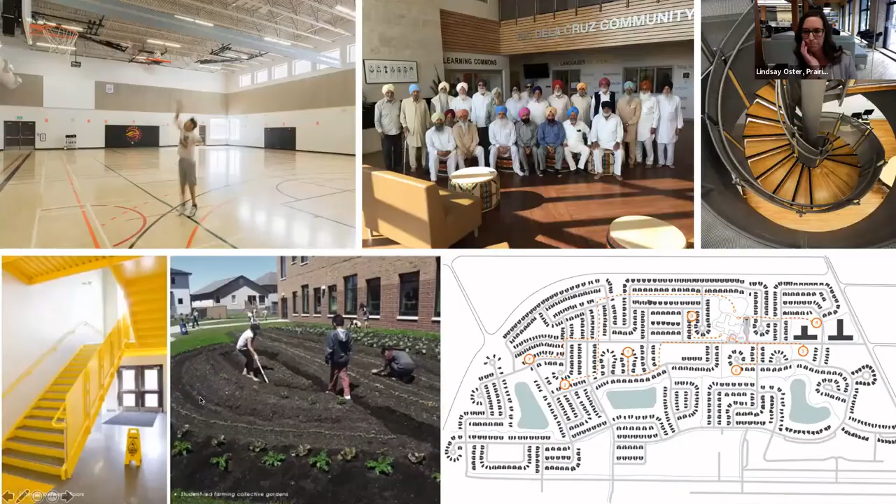So certainly education, early childhood development, but even into employment and working conditions, topics of food security and insecurity, social exclusion and having a social safety network, and of course, gender, race, disability, Aboriginal status, all of these pieces really come into play. So here are a few snapshots from the Amber Trails school community that highlight health and well-being and really start to show how a school can start to contribute to these social determinants of health.

The map on the bottom right is the surrounding community of the school. Here's the school tucked in here. And you can see with these orange dashed lines, these were a network of 7 different walking school bus routes that were actually part of the plan before the school was completed. And so these walking school bus routes encourage active transportation. And through this, the school has seen a 61% reduction of single occupant vehicle usage based on the number of students that then of course walk, bike, roll, or bus. I think this was in the first year, so I'm not sure if those numbers have maintained.

But then you can also start to see, in the upper right corner and lower left, ways that the design started to focus in on health and well-being, and on the top right, looking at even more biomimicry and biophilia in the design. The top left showing a shot of the gym. And what's quite critical here is for years, school designs sort of pushed these big masses of the gym to the inner part of the site or in the back. And in this school in particular, it was really important to bring that to the front, open it up with windows so that it really did create sort of a community usage aspect to it, and as a community center, really.

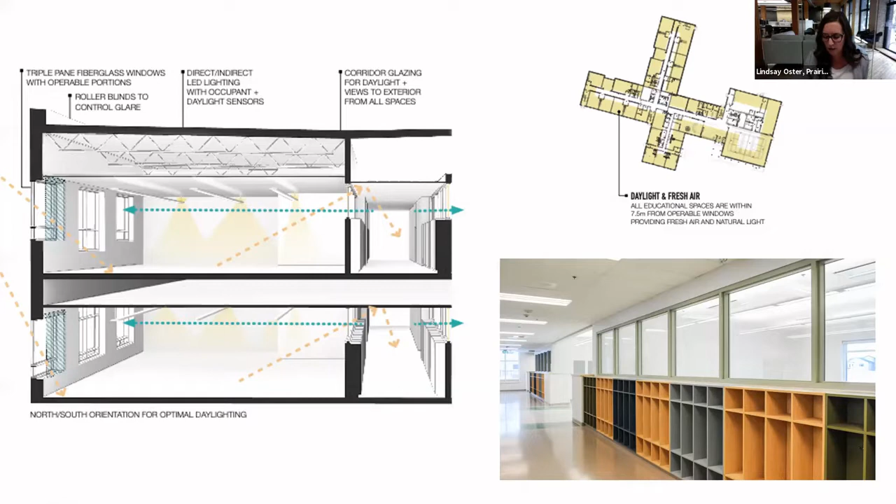And the top plan here shows that all of the educational spaces were designed to be within 7.5 meters from an operable window that would provide fresh air as well as natural light. And that's really key as we're going to start talking about ventilation, I think, in upcoming presentations here.

Okay, so moving into that next theme, energy and other performance metrics. So again, we've had this conversation lots. I think we shouldn't be patting ourselves on the back for being quote unquote better than a less than stellar baseline standard. It really tends to be the pitfall of any certification process, but it's why I think a more holistic approach is important. That said, however, there's no doubt that using targets and performance metrics and benchmarking really are tools that design can use, and it's what drives and creates the high-performing buildings. And without those stringent requirements in place, projects just simply fall short and don't meet those requirements.

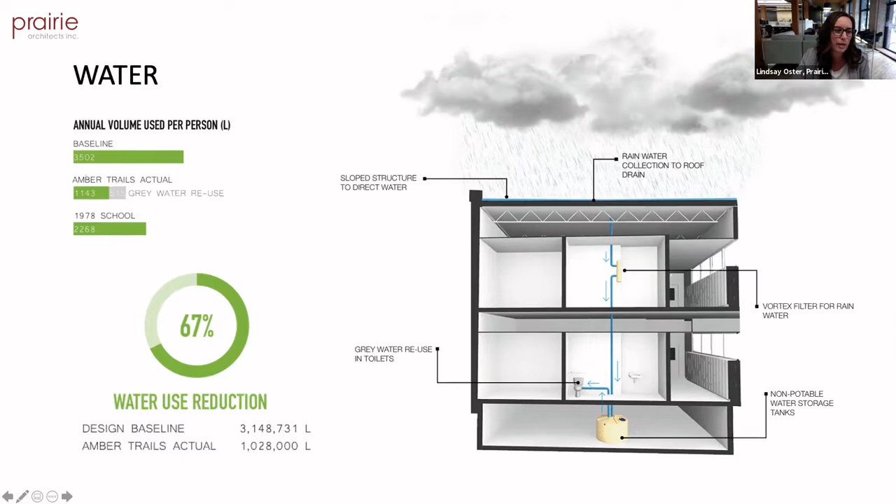So looking at water in particular, the system was designed to collect rainwater in 2 large cisterns in the utilidor. It's a basement space, basically. And that water is reused for the gray water reuse in toilets. And this, with fixtures, really contributed to quite amazing water use reduction numbers. And again, looking at the baseline, probably, like I said, less than appealing baseline. And so Amber Trails is great, but it's also important to look at other kinds of benchmarking. And so when you look at a 1978 school, for instance, really that gray water reuse contributed to quite an excellent water use reduction.

Energy. So there's a lot in this slide, and I don't want to take up too much time going into it, but I do want to say that very early on, the school division decided that the school would be heated and cooled by geothermal, like a ground source heat pump. But there was a really conscious effort to eliminate dependence on fossil fuels. And so the school made the choice not to bring any natural gas service to the building to eliminate any future greenhouse gas emissions. And that was really quite key in this design.

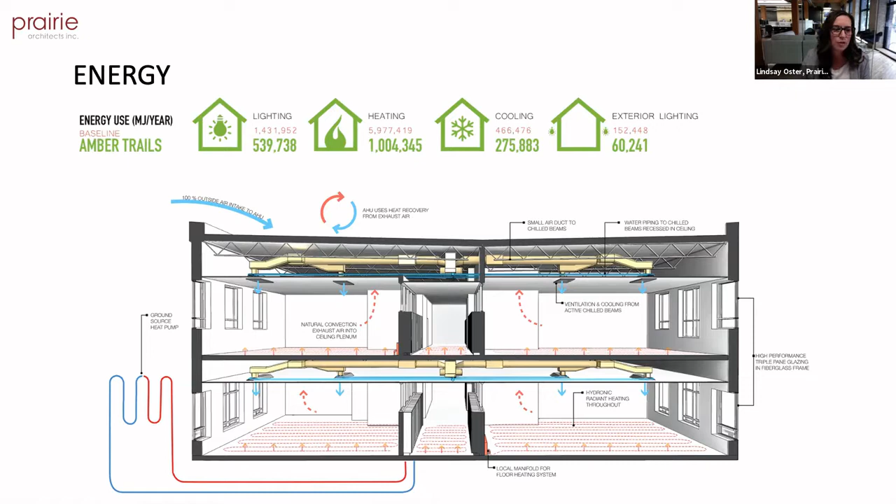So there's a ground source heat pump, as I mentioned, that brings heating to a radiant floor system. For cooling and ventilation, there are active chilled beams in the ceiling space. And then, of course, all of the contributing parts of high performance triple pane glazing and air exhaust. All of these things really contributed quite a bit to the energy savings for the year. So there's a lot of the stats at the top. You can see that there's quite great energy savings.

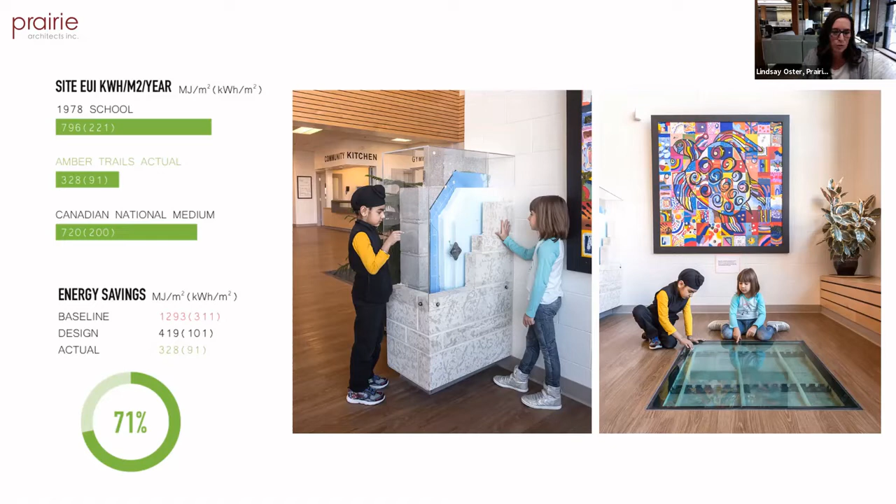But I think what was also quite interesting in this is it's one thing to design a building a certain way, but it's another thing how the building is actually used. So in the first operational year, the school used less than we even anticipated in design. So the school used 91 kilowatt hours per square meter per year for their energy use intensity. And this actually beat the national median by 54.5%. So it's quite a good performing building. And we'll talk a little bit more about how that's exhibited throughout the school so that kids can actually learn from it, as is shown in a couple of these shots here.

But for all of those people that like graphs and metrics, this is a section to talk about it. So what you're seeing on your screen here is a table from a presentation that Public Schools Finance Board gave a number of years back now, I think 2014, and it was entitled The Path to High Performance Schools. And so this looked at a comparison of Manitoba schools over time. And at this time, they were using the line, which is shown in purple here, if you can see, as the 10 kilowatt hours per square foot. So I've just switched metrics here from square meter to square foot, but for those of you that know what that means, hopefully you got it.

And they basically defined that any performance that would fall under this 10 kilowatt hour per square foot threshold would be defined as what they called a zero energy capable building. And so I think really what this is, is the net zero energy ready buildings that we're seeing now with the CAGBC programs. So the blue parts of the bars represent the electricity consumption, and the red is the natural gas. So you can see from the pre-50s buildings to where we were in 2014 with the new schools, you can see sort of what we're doing with that.

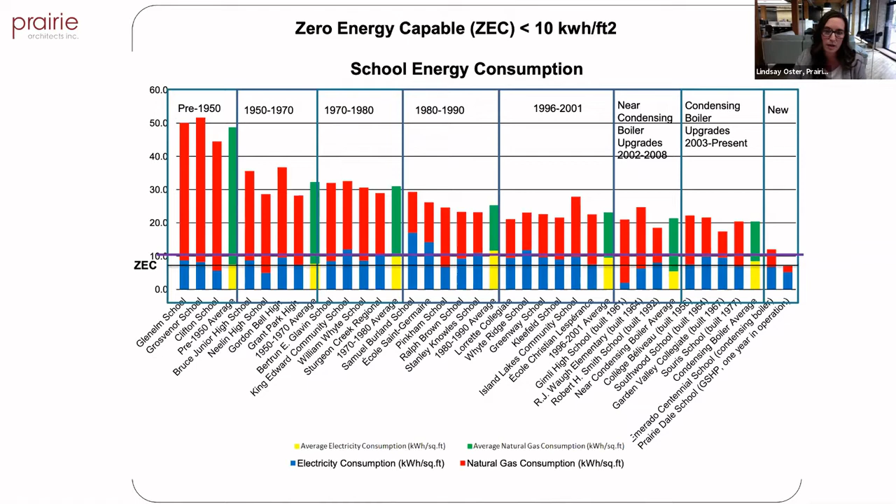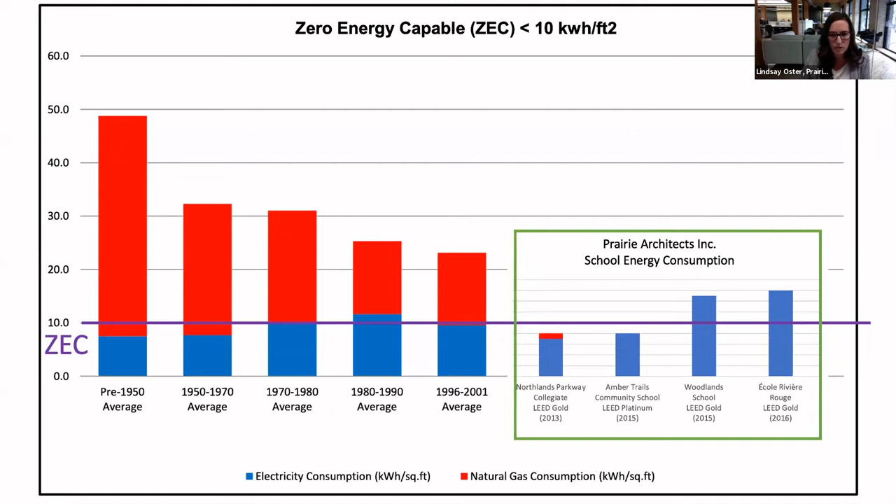So we're in design on other schools, and so we don't have these final metrics to be comparing them, but I do think it's interesting that we can start to see this trend a little bit more.

And so how are we doing for time? I have just 2 more, but they're a little bit quicker.

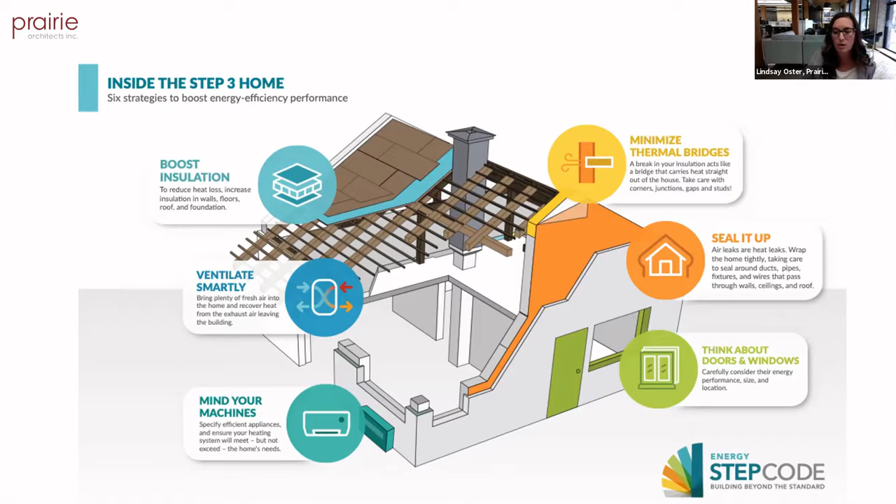But I did want to just point out that according to the Pan-Canadian Framework on Clean Growth and Climate Change, they actually last year said that construction costs for net zero energy buildings had dropped by 40% in the past decade, and are continuing to fall. So I don't know what the pandemic did to that, but it actually starts to become a more realistic future for projects in general, but I think also schools, and we need to start thinking about that.

And I know it's not a school project, but I did briefly want to just show this, because I think that Matt and others might start talking a little bit about displacement ventilation and other aspects related to ventilation. This is a daycare that we did, it's also LEED Platinum certified, and had really, really great metrics. And part of it was largely due to the displacement ventilation system. And also progressing even further from active chilled beams to passive chilled beams for cooling in this daycare.

But when we're talking about future-proofing, what's also interesting to note is that all of the south-facing roofs of the daycare additions to this historical turn-of-the-century house have been provisioned for a future PV solar array. So thinking ahead to what utility costs will do, and as we need to future-proof our buildings, it was important for Canada Life to look at that.

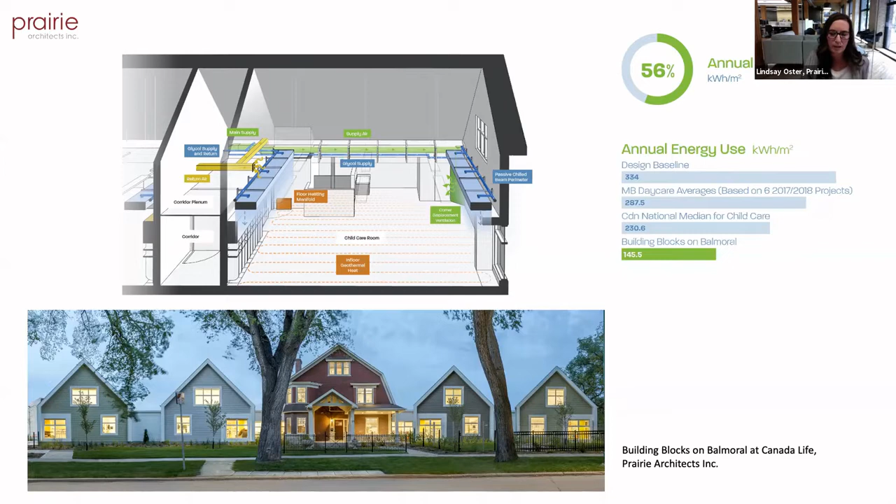And it was really important because it's enabled students to interact with the school facility in ways that they've said have raised their awareness of energy conservation and resource consumption, waste generation, and the influence of the microclimate on building systems and human comfort. And so the school won the Greenest School in Canada competition in 2017. And I think Lorelei will talk a little bit more about that. So this is probably a good jumping off point for her presentation.

But it was really interesting. This had nothing to do with what Prairie or the consultants or the contractor did for this school. But the students started a student-run organic vegetable farm the year after the building was finished. And they work in the summer with a farm coordinator, and they grow a mixture of over 20 different varieties of vegetables. They sell it to staff and community members through a CSA model. And they're learning a lot while doing it.

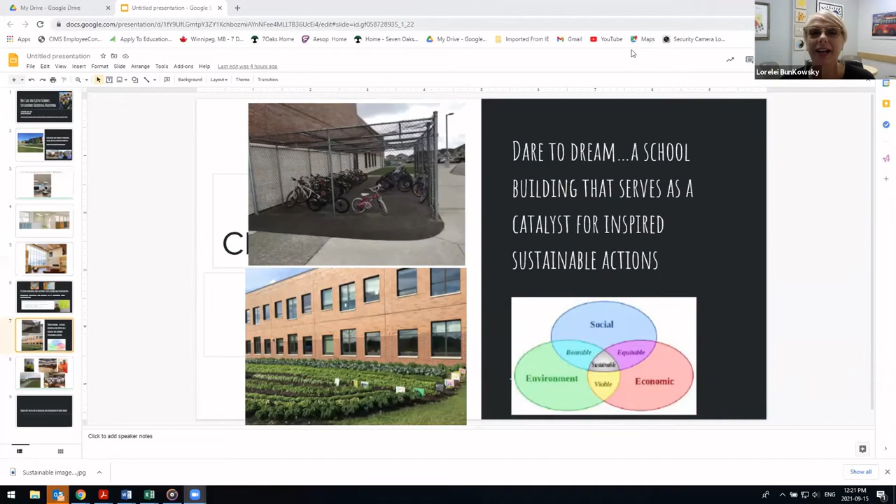Okay, well, Lindsay, it's nice to see you, by the way, and Dudley also. I know both of them from this project, and my name's Lorelei Bunkowsky. I'm former principal at Amber Trails, and I'm just going to get my screen share set up. Lindsay, it's really funny because you and I actually have some of the exact same photos. So the things that really struck us and were part of the work there. So anyway, I just need to undo this. Hold on a second. Sorry. Lorelei, that's why I was really glad to go first. Okay. Well, I hope to go into a little bit more depth into the ideas that you spoke of. So yeah, can you see my screen okay?

Yeah, good. So I wanted to start off by talking about this notion of beginning. And I first want to acknowledge that the former government took bold steps and was courageous in funding schools such as these. And it's a different time now. And I think that needs to be acknowledged because the kind of vision and the way in which this sustainable development priority was funded, I don't know if we would see that existing right now in our current government. So I'm really thankful for that.

Also, we're thinking about this idea of from bricks and mortar to this building of culture. So I had the privilege of being appointed to a school that was just being built, and it really is bricks and mortar. You walk through the building as it's being constructed, and all along, as we saw it in various phases, the discussion was always around the green features that were being built right into the school. So, as a person later in my career as a school principal, a lot of young people in the field as teachers are far more sustainably minded than I might be.

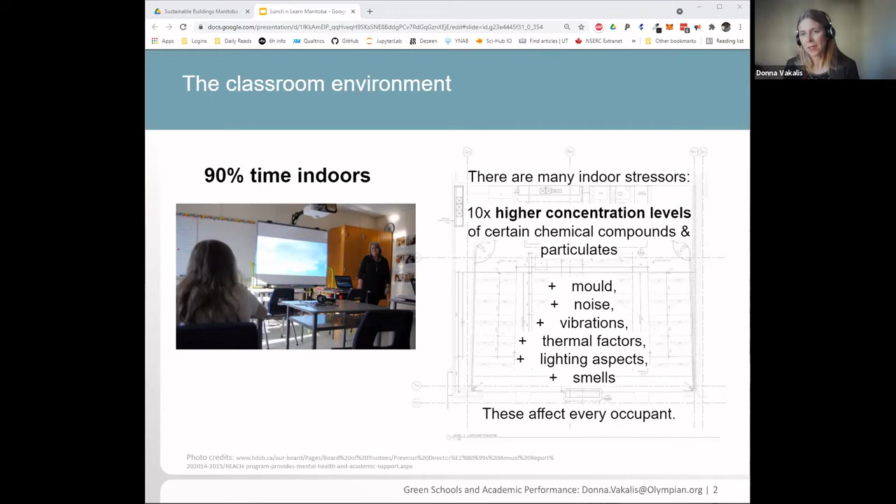And what it means is these little tiny factors inside the school, even if they're small exposures, like a little bit of mold or a little bit of discomfort, they add up. So small, tiny impacts, when you do these exposures repeatedly, can be one of the most impactful things on our health and on our well-being. That's the crux of my PhD. I looked in particular at school buildings and how these little exposures impact academic performance.

And I also have another background, which I will mention here because it's actually relevant. So I studied engineering and epidemiology for my PhD, but I also trained as a national team athlete and went to 2 Olympics. And high performance athletes have 2 really important things in common with young people going to school. One is that when athletes are training, no surprise, the air quality really matters. So one of the things we'll talk about today, and will be the focus of the next presentation, is the importance of indoor air quality to young people.

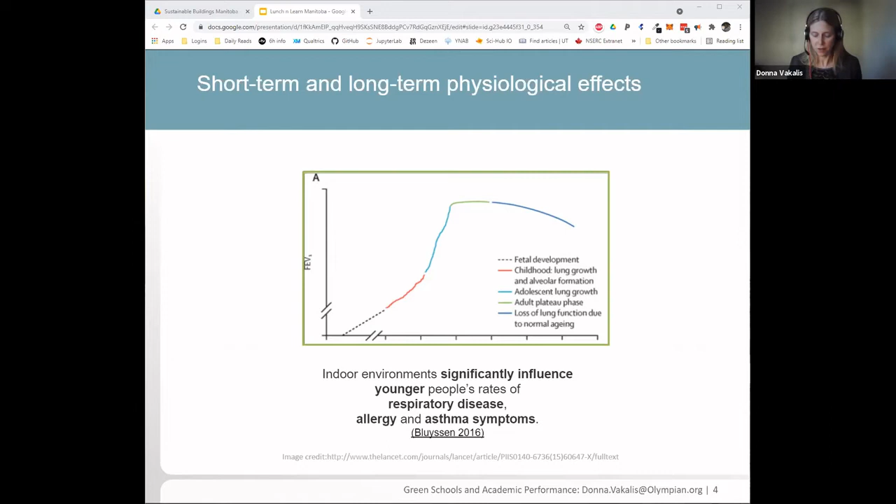So this is just about lung development, but more generally, they're developing, and so they're more sensitive. And then it's not just health effects. There's a large body of research that links specific building design and operation attributes with productivity. So wherever you're doing your office work, your building is impacting you. And where the kids are doing their thinking and learning, the environment is impacting them, especially when they're doing work that is new to them.

So one hypothesis is that when humans do things that take a little bit more effort, not the kinds of tasks you can do on autopilot, but tasks that require you to focus, we're not as able to cope with environmental effects in that situation. So those effects might be noise or light or air quality.

So putting all this into one kind of takeaway is that there's this potential for lifelong consequences, both from, say, missing time in class because you get sick, or you get 1% or 5% lower on a test that then meant a difference on getting into something. Think the cascade effect of what it could mean downstream for your whole life if you're in a classroom that's not enabling you to do your best.

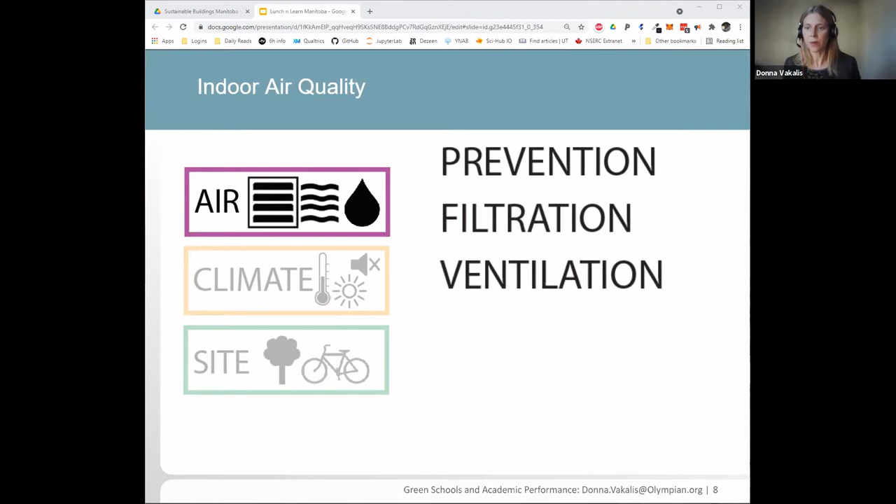So I've tried to put these in 3 buckets because air quality can really be thought of as 3 different strategies. First of all, and best of all, prevent, don't put bad things in your air. Second of all, filter the stuff out if you can. And third, which is still really, really important, basically dilute it with ventilation. So I'm going to show you one example of each of these 3 of studies that show the impact that these can have in schools.

So prevention: volatile organic compounds and formaldehyde, which used to be more common in things like paints and adhesives and laminate wood products, are associated with impaired mental performance. So we want to definitely avoid those. Normally I would spend more time on how you do that, what the strategies are, but I think people here have done a really good job of showing examples of this in practice. In my time, I'm just going to show you some of the research that shows why we don't want these things in our schools.

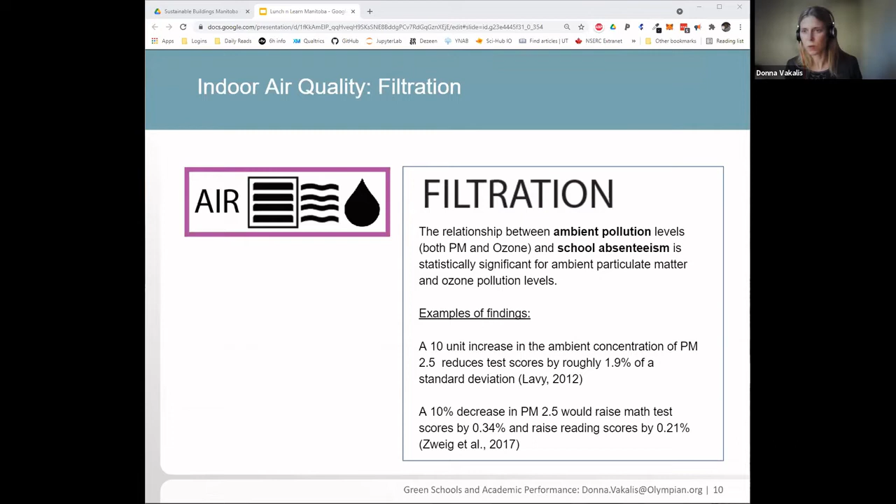Filtration is really important. There's pollutants that come from outside the school, like from cars nearby, from outdoor ozone and particulate matter. That's what PM stands for. There's also indoor pollutants that we generate inside. And so filtering the air is really important. For example, in studies that looked at the relationship of increasing ambient pollution, the research is very convincing that there is an effect on the test scores for students. I've put some examples of math test scores, but these are also replicated for language learning.

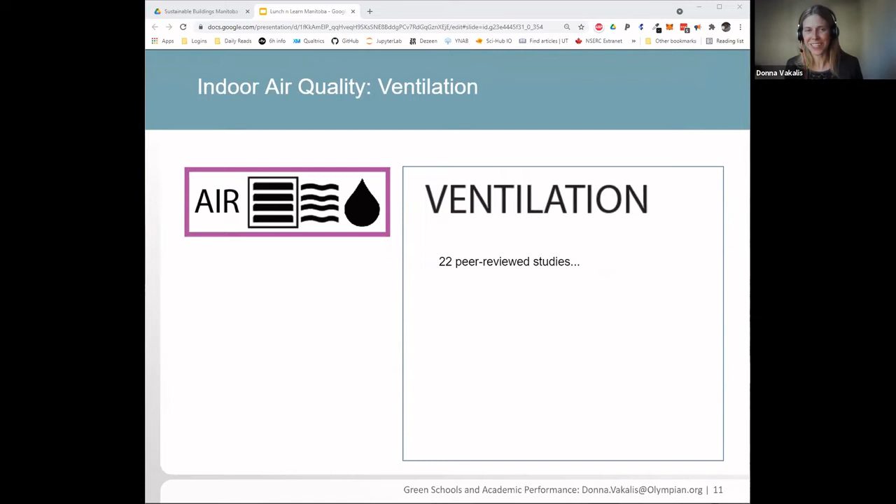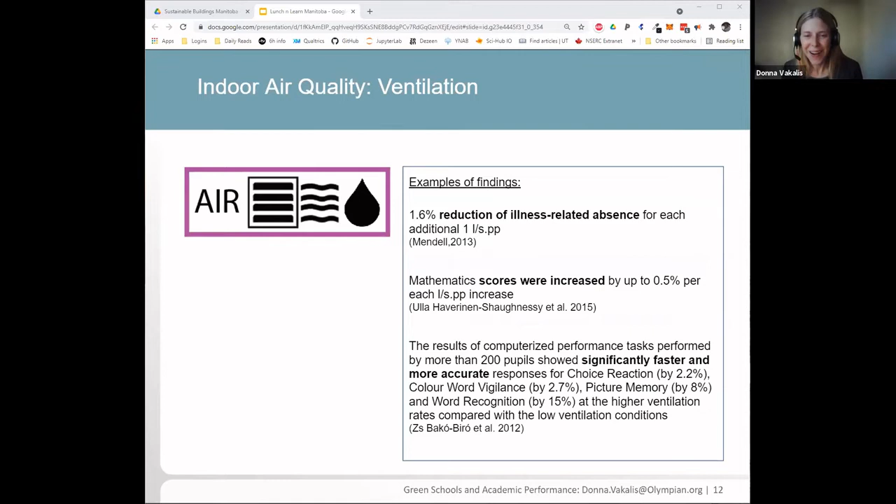So ventilation is really the most studied aspect, and I'm going to touch on it the least because you're going to have another presentation next that focuses in on it. But I looked at 22 peer-reviewed studies and tried to pick out some important findings. We know that good ventilation is related to reduced absences, better scores on math, and in particular, if you break down tasks between being more accurate or being faster, having a better reaction time, students improved in both cases. It was a very well-designed study that showed these things.

Okay, so when I put climate, what I'm really thinking of is this idea of indoor climate. And so 3 biggies are: how warm is it? What's the lighting situation? What are the acoustics like? Thermal comfort has been studied for a long time. We get it intuitively, you need to be within a certain range. What's important is that if it gets too hot, even within the range, it seems to impact performance.

Light, you just need good lighting. No surprise there. One interesting thing is a really strong study on daylighting showed improved test scores. One important thing to note about that study is that this effect was not present for lighting that had a lot of glare. They distinguished between classrooms that had skylights where the teacher could control it or not. And it was the opposite. If you couldn't control the light at all, you no longer had improved test scores.

And noise. There's just decades of research around this, and it impacts. There's different types and categories of noise that I won't get into, but broadly speaking, you can think of noise coming in from the outside, and you can also think of noise generated inside bouncing off the walls. And both of those have impacts on learning.

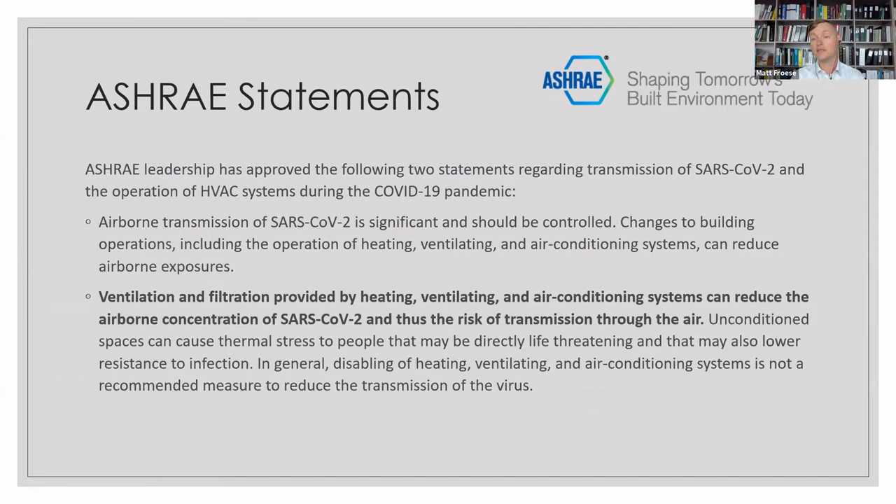So the things that we're doing when we design, when we build, and when we operate our ventilation systems, even though we're not really designing schools for infection control, a classroom's never going to be an operating room, the choices that we make do affect our exposure and potential risks, even though that's not how we're always thinking about it. Now, in case of new challenges, our understanding of the risks is always developing.

But I think part of the guidance from ASHRAE, and they have hundreds of pages of detailed technical information for those who want, and I've got a link at the end, is we can act now based on established best practices, and we can look at experience with other illnesses to have these many points of intersection into what we ought to be doing in schools.

And I think partly too, talking about when we're investing in quality schools, when we're investing in green buildings, the reality is that some HVAC systems, some schools are going to be in a better position to meet the guidance for the pandemic than others. We've got some schools that are maybe 50 years old, have that bunker design with no operable windows that Lorelei talked about. And some that have, like Amber Trails, excellent ventilation, operable windows in every classroom. And those are just in a different position to meet our current challenges.

So ASHRAE has some specific guidance for the reopening of schools in particular, and they cover a lot of stuff, which is important. There's really good checklist level stuff there for folks who are managing schools or reopening schools in this time. Just basic things like inspection and maintenance, but I'm going to highlight a couple of things here, and this I think works pretty well with what Donna just went through.

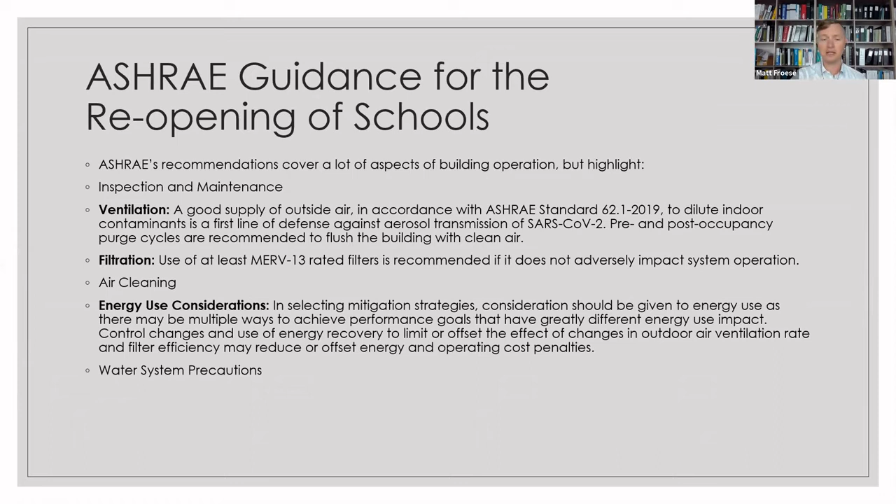So ASHRAE's guidance on the ventilation side, here's the highlights. We want to ventilate to ASHRAE 62. That's the standard that applies to schools in Canada. And so that's not an exceptional thing. That's built into the building code right now.

The recommendation for during the pandemic is, if your system can handle it, to upgrade to MERV 13 filters. These are high efficiency filters above the minimum. And that's the same level of filtration we would do in premium office spaces, or maybe not like a hospital operating room kind of thing, but MERV 13 or MERV 14 filters would be entry-level clinical healthcare spaces as well.

And then, when we're trying to address these temporary challenges, we're keeping an eye on energy and controls. How are we going to deliver these attempts to improve indoor air quality and reduce exposure without excess energy use and cost? And I think that dovetails really well with what we see as best practices in green building programs, including projects pursuing LEED Platinum and achieving LEED Platinum like Amber Trails.

So the guidance there is we're going to ventilate outside air to ASHRAE 62. And then in the case of Amber Trails, there's also credits within LEED to ventilate above the minimum to a certain point, up to 30% more. And Amber Trails also has some systems that minimize recirculation and really provide fresh air, 100% outdoor air to every classroom space. So air from one classroom isn't being recirculated to other classrooms in the building.

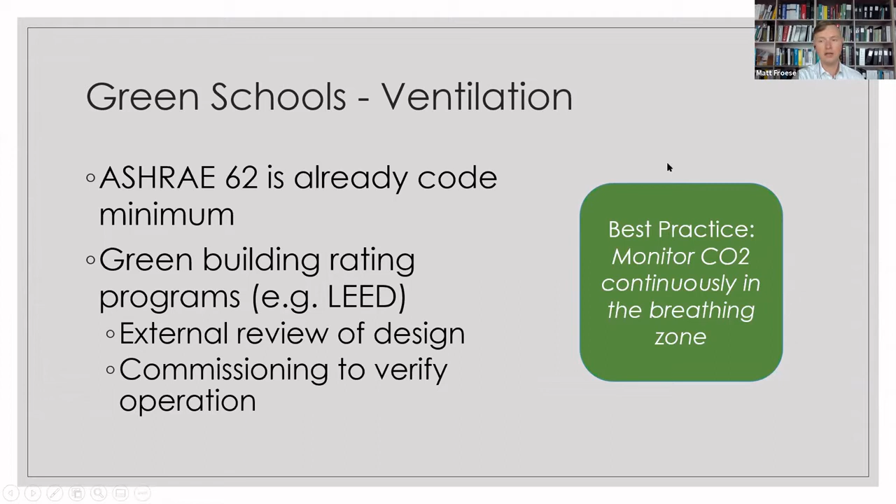The CO2 sensor is going to be on the wall. It's going to be exposed to the same air that you're exposed to. So it's a more direct measure of what's going on. I'm not going to spend tons of time on this, just given timelines here, but carbon dioxide is a great measure of the relationship between ventilation and how many people are in a space. So that's why it's a great indicator for us.

Essentially what we're aiming for in most green building standards, and this is sort of a gross way to think about it, but I think it's helpful, is reducing the amount of air that you're inhaling that someone else has already exhaled. It's not nice, but that's what it means. And basically what we manage to achieve is about 100 times dilution; 1% or so of the air that you breathe in a very well ventilated green building is going to be something that someone else has exhaled. And obviously when we're worried about viruses, that relates to how much virus someone may have exhaled into the air that's being shared.

So there's some historical data here. We don't really have a lot of recent experience in North America with respiratory pandemics. Widespread vaccination has really dealt with measles and tuberculosis and things of that nature. But this is some data from a couple of other parts of the world where those are more ongoing concerns. The top one is based on some stuff out of the 70s in New York where there was a measles outbreak at the time.

And this is an application of some ventilation risk calculations showing that essentially in a typical full classroom, the relationship between the air changes per hour, the ventilation rate for that classroom, and the risk of becoming infected is really strong. There's a really sharp rise in infection risk in poorly ventilated or unventilated spaces. But if we hit reasonable ventilation rates, we can really minimize the aerosol aspect of the risk. And then as recently as 2019, there's the bottom two graphs here.

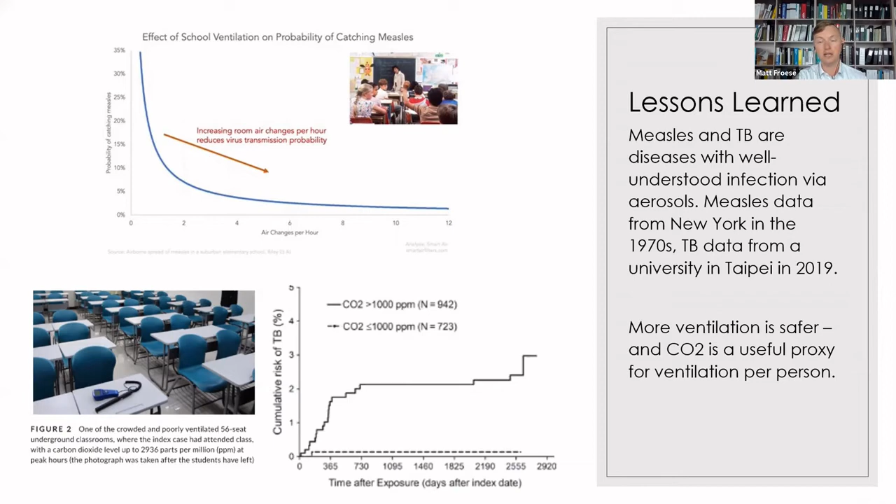And then they have this dividing line here. You've got two cohorts. You've got students who were in spaces where the CO2 was over 1,000 parts per million, and the vast majority of the risk of catching tuberculosis in the school was associated with students in those classrooms. And if you had students in classrooms that had very low CO2, the risk was also very low. So it's a useful proxy. It's a meaningful proxy. It's the closest we can get to really checking on risk in a practical way for this kind of thing.

And the practical part, especially the LEED bit, which is very specific, is saying those CO2 sensors really need to be down in the space, in the air that you're breathing in the room, 3 to 6 feet above the floor, so that they let us know about ventilation issues that show up anywhere in the system. So if the main air handler has an issue, if the fan breaks a belt, if a single damper actuator on one classroom fails, we can get an alert, we can get an alarm and find out about it right away.

Somebody might not feel that or notice that. It might just be stale for a while until it gets very hot or cold outside and you notice the other sides of it. But having that sensor lets us see failures very, very early.

Having those sensors in the room also can alert operators to adjust operating schedules when use changes. I think every building has been through lots of use and schedule changes during the pandemic. We noticed when we were doing some CO2 monitoring in our own office that the ventilation on the floor I work on wasn't quite capturing our more flexible schedule, and that's one of the things that we changed last spring.

I think there's another thing here that's especially applicable to those of us in cold climates, which is ventilation effectiveness. There was some chatter earlier about displacement ventilation, which I'm not going to get into a ton, but displacement ventilation solves the problem I'm going to talk about here. In conventional overhead ventilation, we have very effective ventilation when we're cooling. When we push cool air in from the top of the room, it tends to sink and we get good mixing down to where people are.

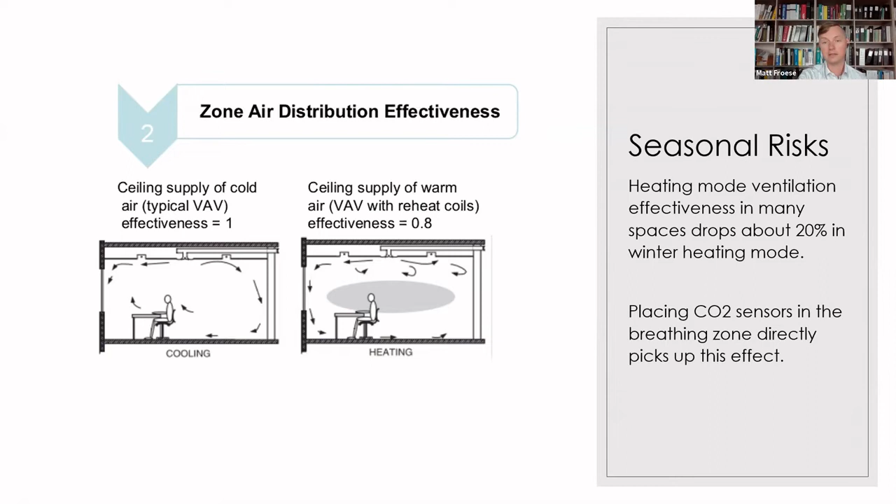On the filtration side that Donna mentioned, our code minimum is MERV 6. MERV is just a filter rating system. So MERV 6 is the basic. It's going to protect the equipment, but it's not going to do much in terms of protecting people as such. The best practice across conventional non-healthcare, non-lab spaces is to move up to MERV 13s. That's where you start to get good management of that small particulate matter that Donna mentioned, the PM.

It doesn't completely capture it, but it really knocks down the concentrations of things like bioaerosols, where we're worried about virus transmission. It also helps with lots of other things, like allergens that might contribute to asthma responses. And this summer, MERV 13 filters were useful across schools and daycares that were operating as we had wildfire smoke exposures.

So I think just to talk a little bit about that, one of the big challenges in ventilation and in green building design right now is that we don't get to solve one problem at a time. Green buildings and investing in green buildings is not just about energy costs, although that's maybe part of the picture. It's not just about climate change, although that's part of the picture. Right now, it's not just about pandemic safety and confidence in the buildings we're coming back to, although that is part of the picture. We also have these issues with outdoor air quality itself. And if climate change continues to drive more of those hot, dry days, more wildfires are realistically part of the package. That's part of something we're going to have to face.